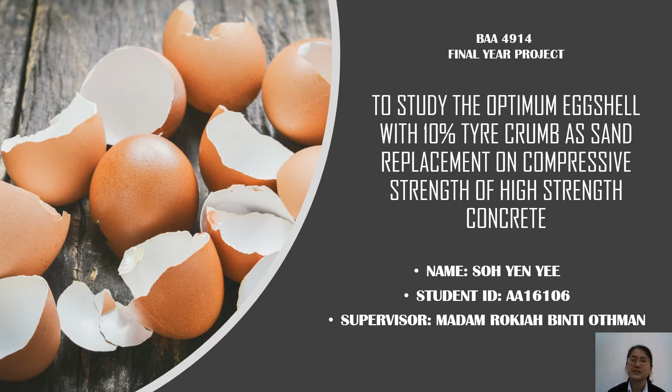Today I'm going to present my final year project entitled To Study the Optimal Eggshell with 10% Tyre Crumb as Sand Replacement on Compressive Strength of High Strength Concrete.

According to Global Cement 2019, cement production lies in the range of 200 to 250 megaton. According to Devi, Lakshmi and Alakanandana 2018, cement is one of the world's most significant manufacturing materials. Because of its prevalence in the world market, the environmental implications of cement manufacturing are becoming increasingly important.

According to Yerramala 2014, the use of eggshell waste instead of natural lime to replace cement in concrete can minimize the use of cement, conserve natural lime, and utilize waste material.

Millions of rubber tires become waste every year and their disposal has become a serious concern. Moreover, the burning of waste rubber tires becomes a cause of pollution for the environment, based on the research done by Sofi 2018. Therefore, concrete production is very unsustainable and creates environmental and health concern issues to the public.

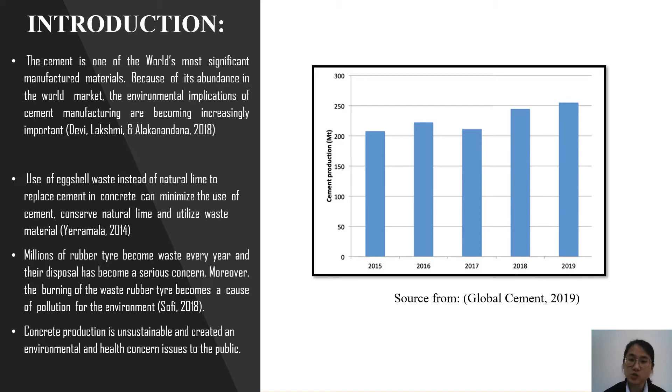We found three problems to investigate in this research. First, limit of natural resources: rapid industrialization and urbanization have occurred to accommodate growing demands of the people. Agricultural and industrial waste byproducts are generated in abundance across the world. Though the quantity and type of waste material may vary from country to country, almost all such waste material ends up being dumped in landfill sites without proper treatment or re-use.

Secondly, performance of conventional concrete. Based on the research done by Gosavi and Awari 2018, conventional concrete designed on the basis of compressive strength does not adequately meet functional requirements such as impermeability, resistance to frost, and thermal cracking.

Thirdly, inadequate rubber waste landfill problem. Tires are scrapped at a rate of 1.1 tires per person per year, leading to over 300 million tires scrapped per year. Landfill space is becoming more and more scarce as tires do not biodegrade.

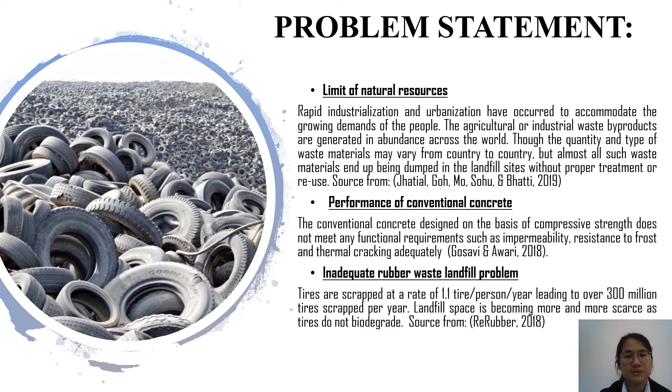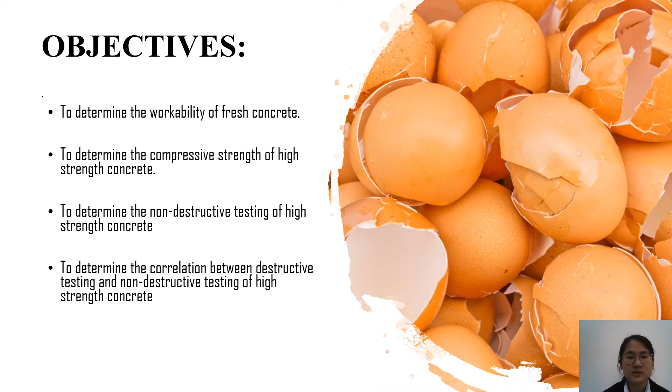The objectives of this research are to determine the workability of fresh concrete, to determine the compressive strength of high-strength concrete, to determine the non-destructive testing of high-strength concrete, and to determine the correlation between destructive testing and non-destructive testing of high-strength concrete.

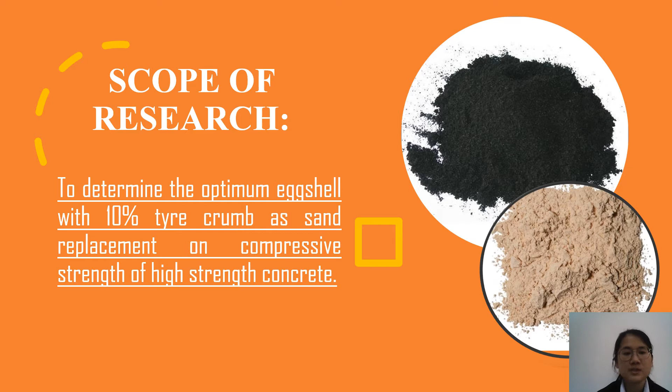In this research, our scope is to determine the optimal eggshell with 10% tyre crumb as sand replacement on compressive strength of high-strength concrete. The significance of this research is to reduce the consumption of cement with partial replacement of eggshell to produce sustainable concrete.

Secondly, to reduce the consumption of sand with partial replacement of tyre crumb to reduce landfill problems. Thirdly, utilizing waste material promotes green construction towards a sustainable environment.

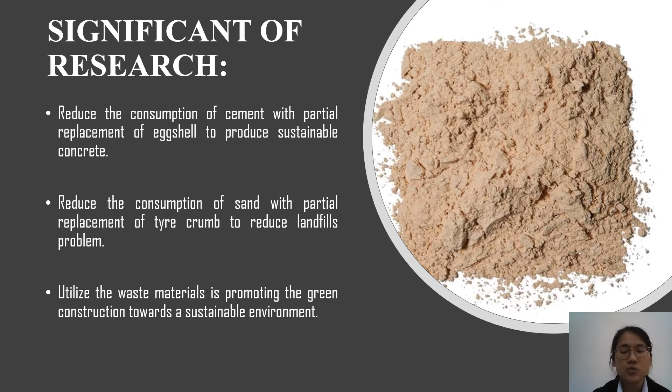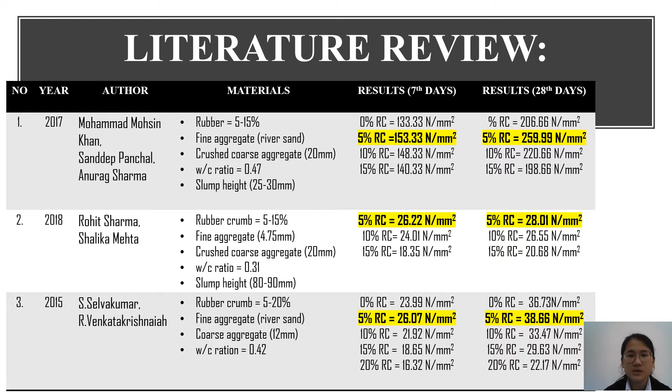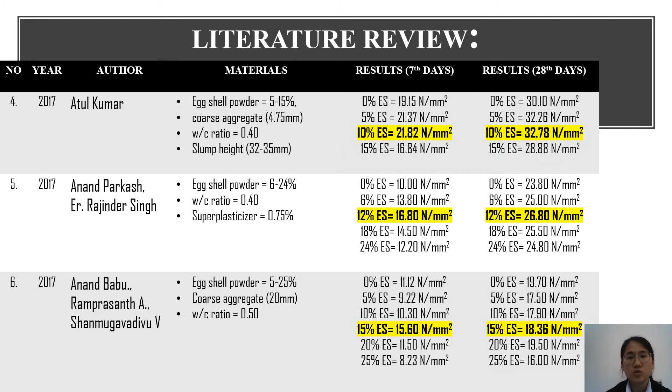Based on previous researches, we can summarize that 5% tyre crumb as sand replacement in concrete obtains the optimal compressive strength for both 7 days and 28 days. Also, the optimal compressive strength of concrete is achieved in the range of 10% to 15% eggshell replacement as cement in the research.

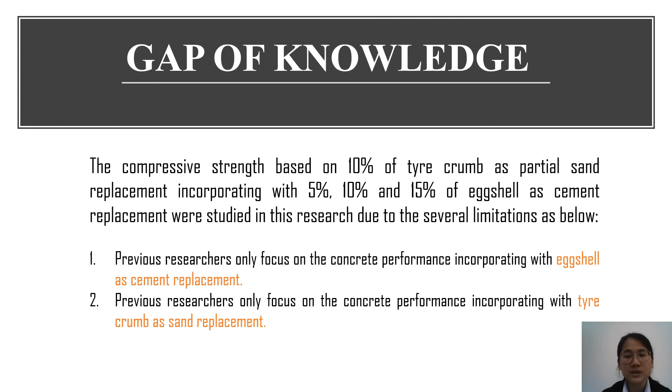The compressive strength based on 10% tyre crumb as partial sand replacement incorporating with 5%, 10%, and 15% eggshell as cement replacement was studied in this research due to several limitations. First, previous researchers only focused on concrete performance incorporating eggshell as cement replacement. Secondly, previous researchers only focused on concrete performance incorporating tyre crumb as sand replacement.

According to Table 1, chemical composition of cement versus eggshell, we can see that the calcium oxide in eggshell is very close to the limestone composition in cement.

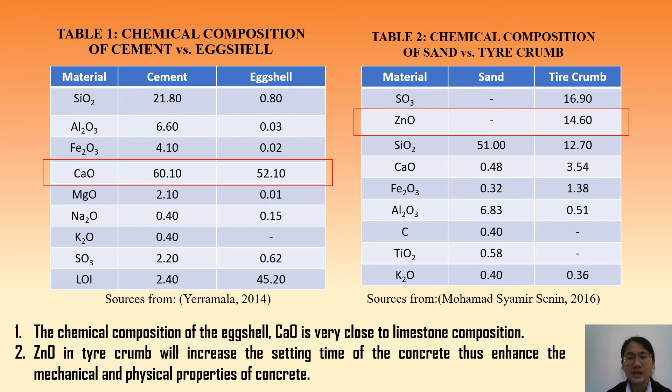According to Table 2, chemical composition of sand versus tyre crumb, the zinc oxide in tyre crumb will increase the setting time of the concrete, thus enhancing the mechanical and physical properties of concrete.

Here are the mix designs used in this research. We base on this mix design to prepare our amount of materials, such as cement, fine aggregate, coarse aggregate, eggshell, and tyre crumb.

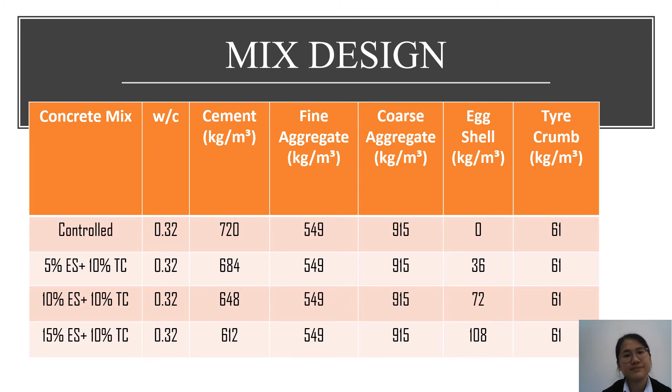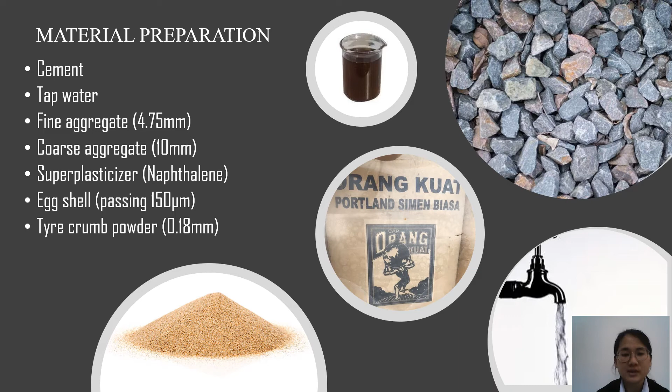The materials used in this research are cement, tap water, fine aggregate passing through a 4.75 mm sieve, coarse aggregate passing through a 10 mm sieve, naphthalene as a superplasticizer, eggshell passing 150 micrometer, and tyre crumb powder passing 0.18 mm.

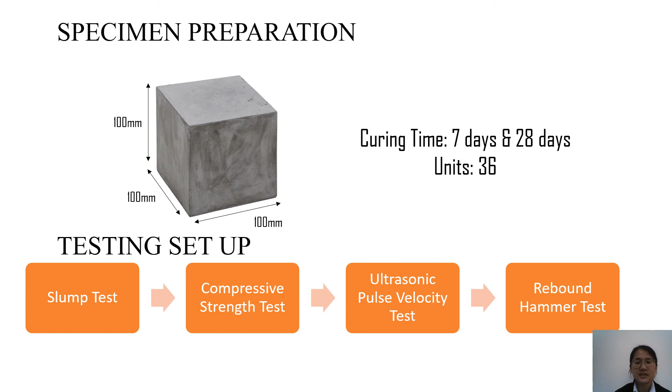The specimens we are going to cast are 36 units for water curing of 7 days and 28 days. We will conduct testing such as slump test, compressive strength test, ultrasonic pulse velocity test, and rebound hammer test. Here we are going to discuss our results.

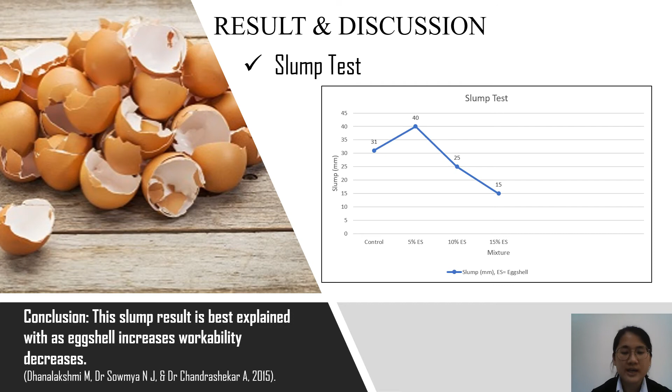First of all, the slump test, which is conducted to determine the workability of fresh concrete. From this result, we can know that the 5% eggshell concrete specimen obtained the highest slump compared to the control concrete specimen and the other percentage eggshell replacements as cement. This slump result can be explained as: with eggshell increasing, workability decreases.

Secondly, the compressive strength test is conducted in this research. From the results, we can know that the 5% eggshell concrete specimen as cement replacement obtained the optimal compressive strength for both 7 days and 28 days.

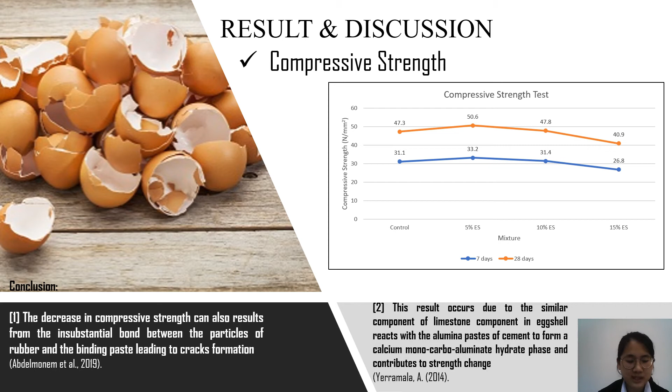We can make a small conclusion: the decrease in compressive strength can also result from the insubstantial bond between the particles of rubber and the binding paste, leading to crack formation. Secondly, this result occurs due to the similar limestone component in eggshell reacting with the alumina pastes of cement to form a calcium monocarboaluminate hydrate phase, contributing to a strength change.

Thirdly, the ultrasonic pulse velocity test, known as the UPV test, is conducted in this research to evaluate the homogeneity performance of concrete. Based on the result obtained, all the concrete specimens achieved a good grade performance due to proper compaction resulting in lesser voids existing in the concrete.

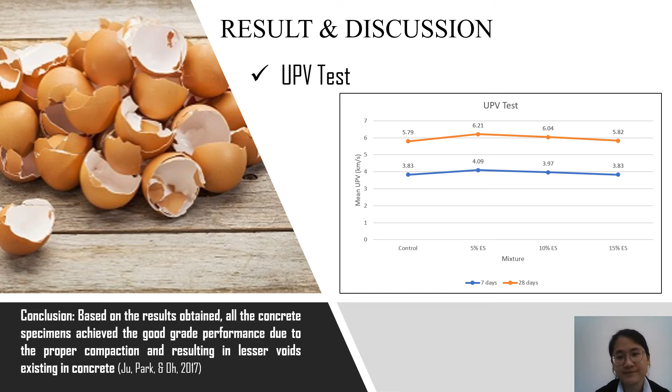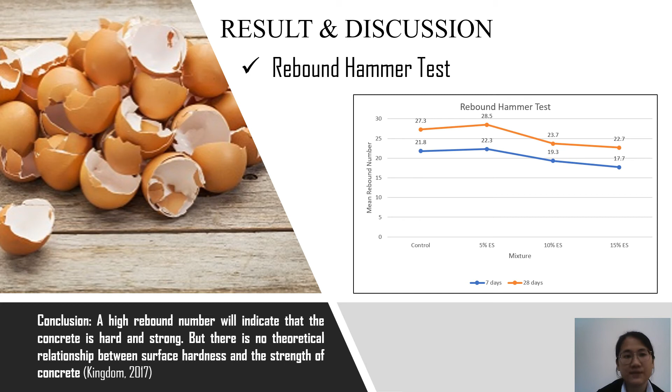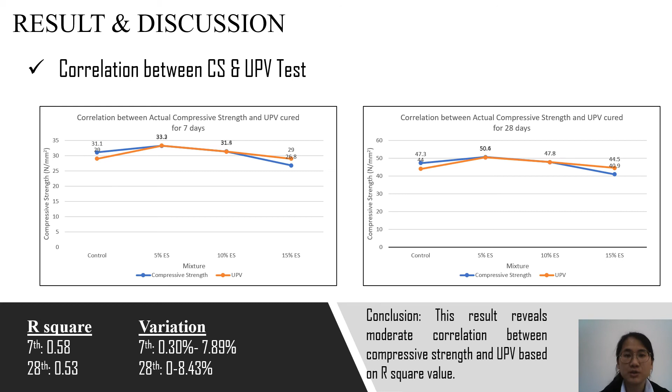In this research, we also studied the correlation between compressive strength and the UPV test. From the results, we can know that the variation lies between 0 to 8.43% for both 7 days and 28 days. From the R-squared obtained from this analysis, the value falls between 0.53 to 0.58. This result reveals a moderate correlation between compressive strength and the UPV test.

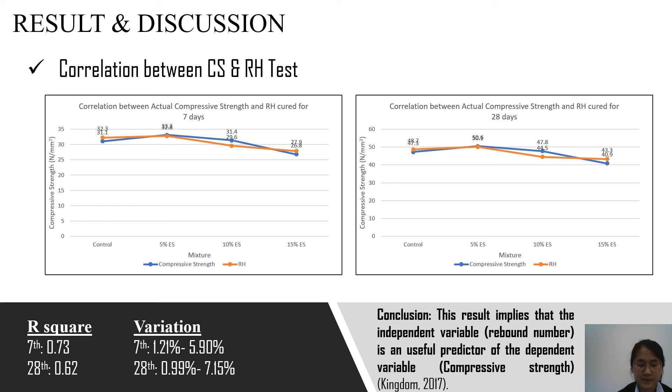The last part we discuss is the correlation between compressive strength and the rebound hammer test. From the analysis, the variation lies between 0.99% to 7.15% for both 7 days and 28 days. We also obtained an R-squared value between 0.62 to 0.73, indicating a strong correlation between compressive strength and the rebound hammer test. According to Kingdom 2017, this result shows the independent variable, the rebound number, is a useful predictor of the dependent variable, compressive strength.

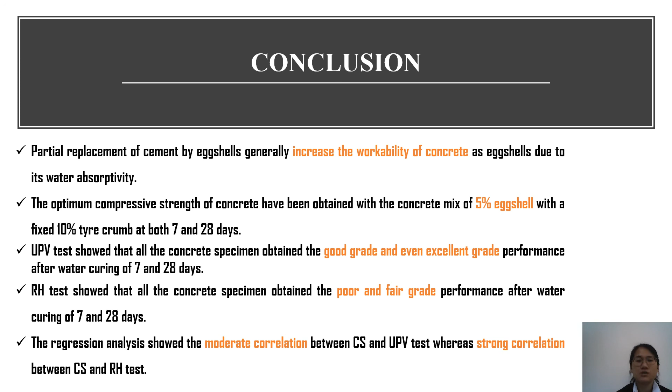UPV tests show that all the concrete specimens obtained good grade and even excellent grade after water curing of 7 days and 28 days. Whereas rebound hammer tests show that all the concrete specimens obtained poor and fair grade performance after water curing of 7 days and 28 days. Lastly, the regression analysis showed a moderate correlation between compressive strength and the UPV test, but a strong correlation between compressive strength and the rebound hammer test.